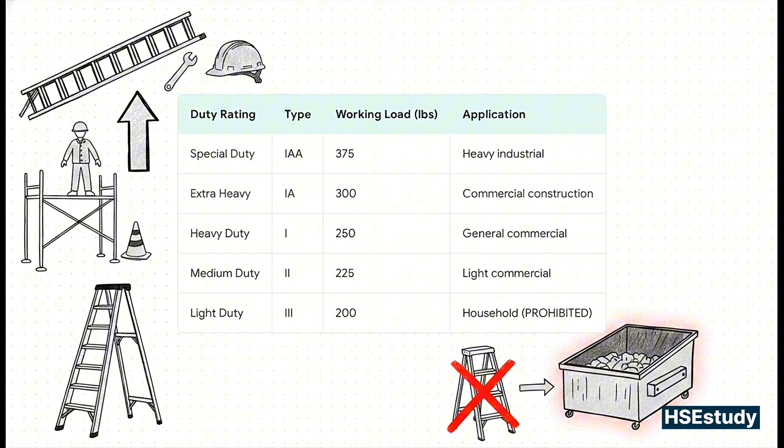Now, pay attention to this last one, the Type III light duty ladder. It maxes out at 200 pounds and is made for painting your living room or hanging Christmas lights. Let me be perfectly clear. Type III household ladders are strictly prohibited on our commercial job sites. If you bring one from your garage to this site, it's going straight into the dumpster. No exceptions.

So the crucial point here is understanding exactly how to calculate your weight on that ladder. We call this the weight math, or the maximum intended load. OSHA says you can never, ever load a ladder beyond its duty rating. And hey, it's not just about what the bathroom scale says when you step out of the shower. You've got to use the rule of 3. That's your body weight, plus the weight of your heavy tool belt and PPE, plus whatever materials you've got in your hands.

So if you're a 200-pound guy wearing a 30-pound tool belt and hauling up a 25-pound bucket of mud, congratulations, you're at 255 pounds. You literally just exceeded the legal limit of a 250-pound Type I ladder. You'd need an extra heavy-duty Type IA for that task. Always do the math before you climb.

And honestly, this brings up a really clear divide between the seasoned pros and the rookies out here. The common rookie mistake, and we see it constantly when guys are rushing to beat the clock, is just grabbing the nearest ladder off the truck to save a couple of minutes. They don't check the rating, they just want to get up there and get it done. Don't be that guy. The pro tip: a true professional always checks the ANSI duty rating label on the side rail before climbing. It takes 3 seconds.

Just 3 seconds to verify the maximum working load capacity and prove that ladder is actually rated for what you're about to do. Never climb a mystery ladder. If that tag is missing or you can't read it because it's covered in drywall mud, treat it as a massive red flag. And this brilliantly illustrates what we're talking about when you actually inspect that gear.

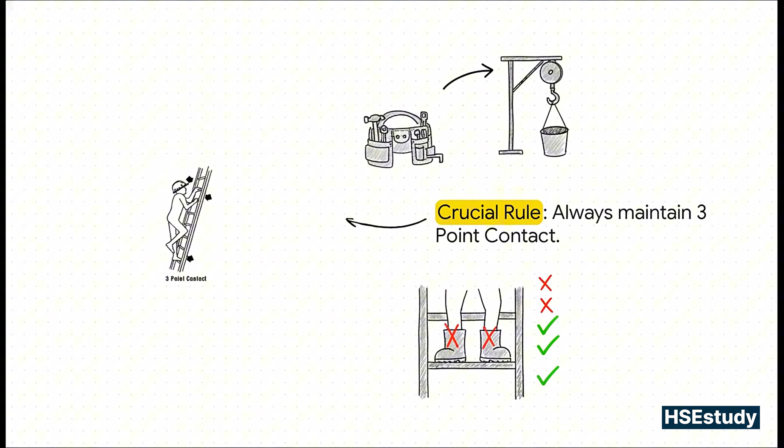Let's move to how this builds directly into the legal responsibilities of our site supervisors and foremen. Listen up, leaders. Under Subpart X, the competent person on site bears a really heavy burden. Number 1, you are legally required to ensure ladders are inspected before every single work shift. Number 2, if a ladder is cracked, bent, or missing hardware, you don't just lean it back against the wall for the next guy. You must immediately withdraw it from service and physically slap a do not use tag on it or destroy it so nobody else can accidentally use it.

And number 3, it is your duty to train the crew. If your workers can't explain load ratings to me, or they don't know proper setup and hazard recognition, your site is vulnerable, and frankly, you're failing as a leader.

So, let's say you've done everything right. You've checked the duty rating, you've done the math on your maximum intended load, and your supervisor has thoroughly inspected the gear and said it's good to go. The foundation is totally set. But what happens once the right ladder is chosen and inspected? How do we actually place that extension ladder against the building to guarantee it doesn't just kick out from underneath us the second we step on that first rung?

All right, so wrapping up our walkthrough on stairway requirements, let's go ahead and pivot to the next major hazard we deal with on our sites: portable ladders. Now, ladders are one of those tools that just get taken for granted, right? We use them at home to clean the gutters, we use them on the site to get to a working level, and because they're literally everywhere, ladder safety gets exactly zero consideration, right up until something goes terribly wrong.

Well, in our line of work, we cannot afford zero consideration. According to the CDC, looking back at the first 10 years of this century, falls from ladders made up an unbelievable 43% of all fatal falls. 43%. Just let that sink in for a second. We're talking about nearly half of all fatal falls involving a tool that almost every single one of your workers uses every single day. We've lost hundreds of lives because of a piece of equipment that seems so simple, people just forget to respect it.

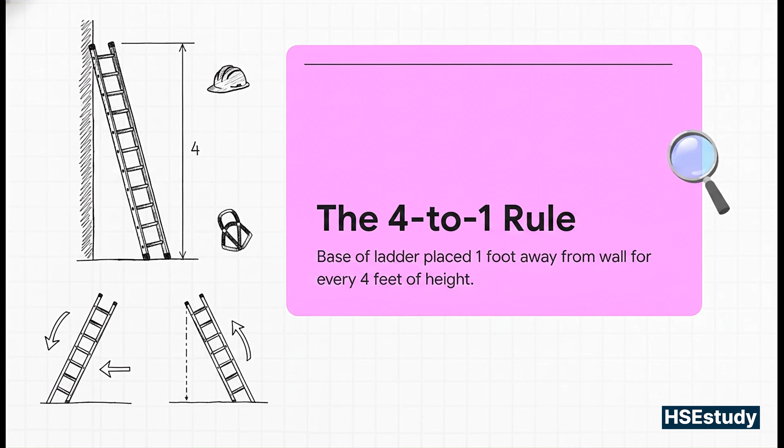And honestly, setup matters just as much as the condition of the ladder itself. OSHA strictly prohibits setting up ladders on boxes, barrels, or any other unstable bases just to gain a few extra inches of height. Ladders have to be used on stable and level surfaces, unless they're properly secured to prevent accidental displacement. I mean, setting up in the mud or on a slick floor without securing the ladder, that is just asking for an ambulance. Oh, and check their boots. Shoes need to be totally free of mud and grease before they even touch that first rung.

Industry veteran Richard Dixon puts it perfectly. There is absolutely zero excuse for using a damaged ladder. Before every single shift, these things must be inspected for visible defects. We are looking for cracked rails, loose rungs, missing feet, corrosion. And let me be perfectly clear, makeshift repairs with duct tape or scrap wood are strictly prohibited and completely unacceptable. If it cannot be repaired to manufacturer specifications, it's done.

Get rid of it. This right here is exactly why your site needs a formalized, competent person for ladders. And I don't just mean a title you throw at some guy on Tuesday. It requires specific training and, most importantly, explicit authority to stop work. When they do their daily inspections, if they find a structural defect, they must immediately mark it "Do Not Use." But honestly, in the field, just tagging it isn't always enough. A strong, competent person will physically destroy that bad ladder, literally cut it in half so no one else gets the bright idea to pull it out of the dumpster and use it anyway.

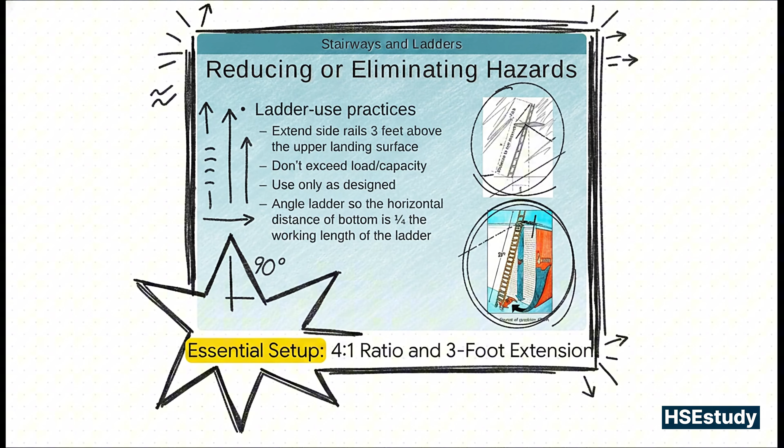Okay, so let's break down that angle calculation, which brings us to the famous 4-to-1 rule. This rule is the absolute bedrock of your safety. It's a simple, non-negotiable ratio that ensures gravity is working with you, not against you. And spoiler alert, gravity always wins, so we really have to do the math here.

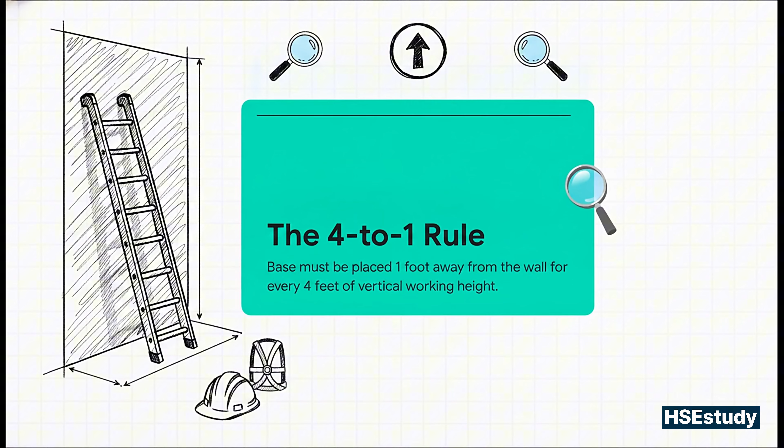If you're climbing 20 feet up in vertical height to reach a roof, the base of that ladder needs to be placed exactly 5 feet away from the wall. 1 foot out for every 4 feet up. It really is that straightforward. Now here is the exact math behind that rule. When you nail that 4-to-1 ratio correctly, you're creating an optimal 75.5-degree angle.

Extensive engineering data proves this is the exact sweet spot for balancing a worker's load while climbing. At exactly 75.5 degrees, the downward force of your weight is perfectly distributed between the structure you're leaning on and the ground below you. But what happens when you miss that sweet spot on the job site? Well, the dangers become obvious pretty fast.

Say you set it too steep, meaning an angle greater than 78 degrees. Your center of gravity shifts outward as you climb. Lean back just a hair, and boom, you tip backward, taking the ladder right with you.

On the flip side, if the angle is too shallow, less than 73 degrees, lateral forces skyrocket. They actually overcome the friction on the ground, and that base just kicks right out from under you. Both of these scenarios end in a catastrophic fall.

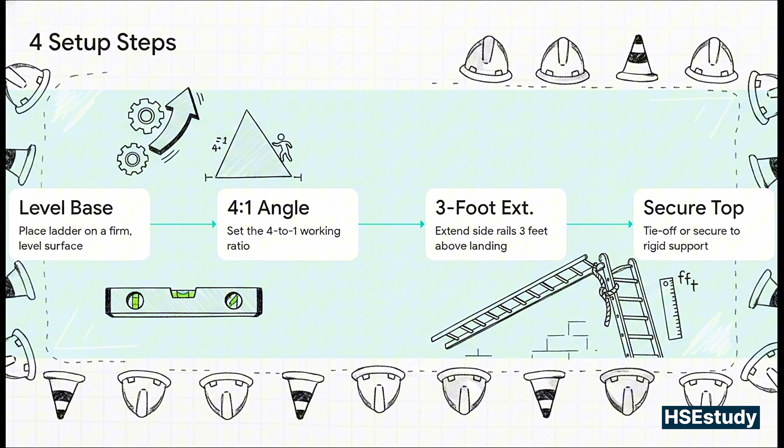As foremen and supervisors, I need you training your crews to mechanically run through these exact 4 steps every single time they position an extension ladder. Step 1, level and firm the base. Step 2, set that 4-to-1 working angle. Step 3, get those side rails extended 3 feet above the landing. And step 4, secure the top support. If you can build this muscle memory into your guys, you're eliminating the majority of ladder hazards before anyone even puts a boot on the bottom rung.

Take a look at this real job site photo and ask yourself, would you let your crew climb this? It's resting on loose, uneven dirt right next to what looks like a trench layout. This is a massive, massive hazard. The surface is neither level nor firm. The second a worker gets halfway up, their weight is going to shift that left foot right into the loose soil, twist the ladder, and throw them right off.

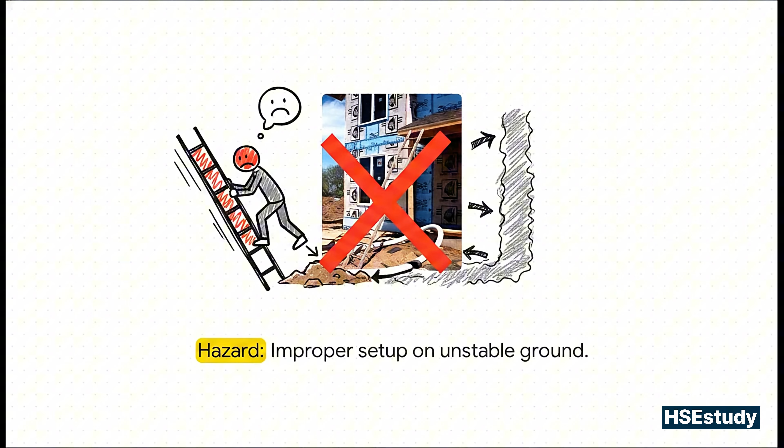In my time walking sites, I see these exact same setup mistakes happening every single day. Why? Usually, it's just guys rushing and skipping the basics of 1926 Subpart X. They eyeball the angle instead of actually measuring the 4-to-1 ratio. They set up on slippery or unstable dirt. They skip tying off the top because they're just going up for a second. They carry heavy tools in their hands instead of using a tool belt or a hoist, and they overreach to get the job done faster.

Speaking of overreaching, here's a great field trick to keep in your back pocket to avoid that specific mistake: the belt buckle rule. It is incredibly simple. If your belt buckle crosses outside the vertical side rails of the ladder, you've shifted your center of gravity way too far. Stop, climb down, and move the ladder over. Seriously, it takes maybe 30 seconds to reposition, but stretching to save that half a minute is a leading cause of lateral tip-overs.

And OSHA Regulation 1926.1053 is crystal clear in its text. If you literally cannot find a perfectly level and stable surface, say you're working on a sloped grade that you just can't level out, that ladder must be mechanically secured to prevent accidental displacement. You can't just have your buddy hold the bottom while you climb 30 feet up. It absolutely has to be properly secured.

Securing the top of the ladder to a rigid support that won't deflect is just as critical. Sometimes you're stuck in a spot where the ladder is just too short to safely get that mandatory 3-foot extension above the landing surface. In that specific scenario, the OSHA standard dictates that the ladder must be secured at its top to a rigid support, and you have to provide a grasping device, like a grab rail, to help the worker mount and dismount safely.

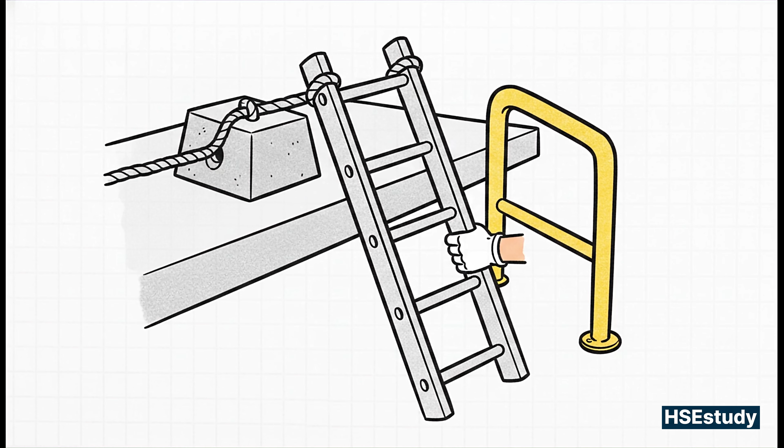Look, ignoring these setup rules isn't just dangerous, it's a massive liability for your site. Ladder violations were the number 3 most frequently cited OSHA violation across all industries in fiscal year 2024, with thousands of citations issued. And specifically, failing to extend those side rails 3 feet above the landing accounted for the lion's share of them. It's a super common oversight, and inspectors are actively hunting for it.

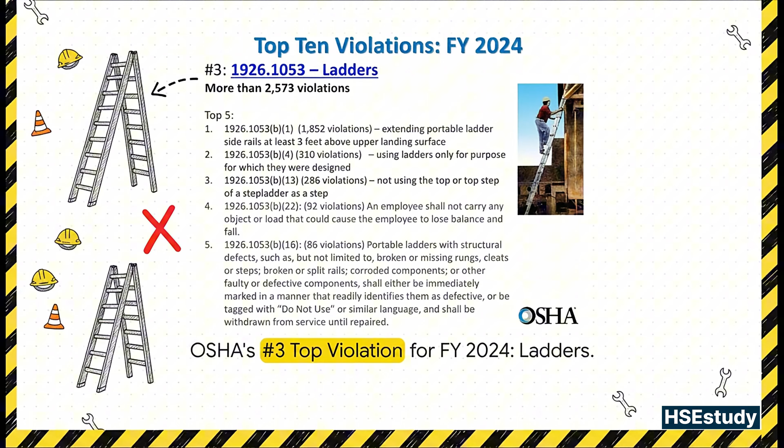Want to know what that oversight costs? If an inspector catches a serious 1926.1053 violation on your watch, like missing that 3-foot extension or totally ignoring the 4-to-1 angle rule, you're looking at a maximum fine of $16,550 per offense, based on the 2025 penalty schedule. And that's just the baseline for a serious violation. If they deem it a repeated or willful violation, those numbers just skyrocket.

Ultimately, that financial and moral accountability falls squarely on you, the supervisors. You have to ensure a competent person is thoroughly inspecting every single ladder for visible defects before a work shift even begins.

That means physically running your hands down the stiles looking for cracked rails, checking for loose rungs, missing slip-resistant feet, and making sure the whole thing is completely free of oil, grease, or any slipping hazards. Inspection isn't a nice-to-have, it's a fundamental requirement.

Now, if you do that inspection and find a cracked fiberglass rail, a bent aluminum rung, or missing hardware, what do you do? I'll tell you what you don't do. Temporary duct tape fixes. There are absolutely no field repairs like that allowed. None. You must immediately tag that ladder do not use and pull it from service until it's properly repaired to its original design specs or totally destroyed. Leaving a busted ladder leaning against the wall is practically begging someone to use it and get hurt.

All right, so the equipment is perfectly set up. It's fully inspected, sitting firmly on level ground at a perfect 75.5-degree angle, extended 3 feet above the roofline and locked in securely at the top. The physics of the ladder are completely optimized, which means the only remaining variable for a safe ascent is exactly how you position your hands and feet once you step onto that first rung. Let's look at exactly how to do that.

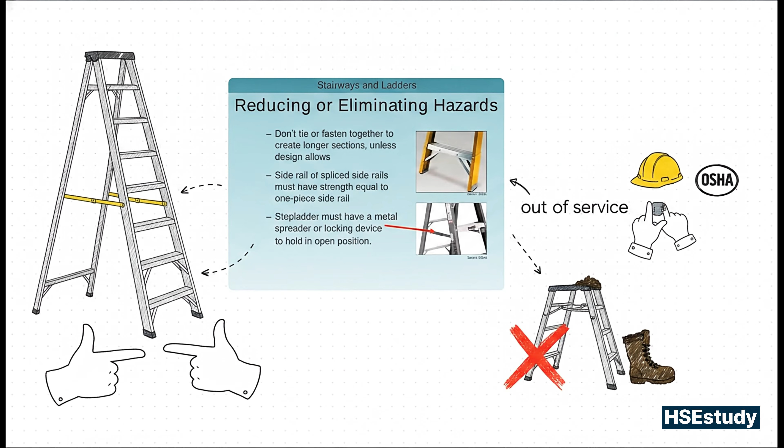And this right here brilliantly illustrates one of the most critical structural components of the A-frame. Take a close look at the metal spreader bar on the screen. OSHA strictly requires that every single stepladder have a metal spreader or locking device to hold the front and back sections in an open position. Here's a pro tip for the field. Never, ever climb until you physically verify those spreaders are fully pushed down and locked into place. If they're slightly bent, or if the hinges are just packed solid with drywall mud and won't lock out fully, that ladder is out of service, period.

Okay, this brings me to a habit I see out in the field all the time, and it drives me crazy. Never, ever use a closed stepladder leaning against a wall like an extension ladder. When you do this, you completely destroy its lateral stability. You see, the rubber feet on a stepladder are angled to grip the floor specifically when it's open as an A-frame. When you lean it closed, only a tiny little edge of hard plastic or metal actually touches the floor, making a slide out almost guaranteed. OSHA cited 310 violations last year for using ladders for purposes other than what they were designed for, and using a stepladder as a straight ladder is exactly the kind of shortcut they're looking to catch.

Let's break down the physical kinematics of safe positioning when you're actually up there working. Always face the ladder whenever you climb up or down. And here is a fantastic memory trick you can teach your crews.

We call it the belt buckle rule. Keep your belt buckle centered right between those side rails at all times. Do not overreach. If you lean your belt buckle past that side rail, your center of gravity shifts completely outside the footprint of the ladder, and gravity is going to take over.

Also, never straddle the front and back sections. And please, whatever you do, don't ever try to walk or hop the ladder while you're standing on it. Just climb down, move the ladder, and climb back up. It takes 10 seconds, and it could literally save your career.

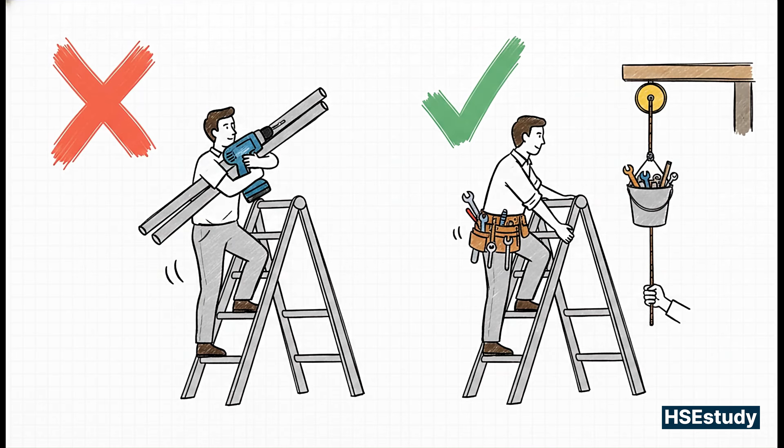Remember that 3 points of contact rule we talked about? Well, how exactly are you supposed to maintain it if your hands are full of drills and conduit? You can't. Carrying tools or loads in your hands while climbing totally destroys your balance and stability. This is an explicit OSHA violation, specifically 1926.1053(b)(22), and it was cited 92 times last year. The solution here is so simple. Just wear a tool belt, or use a hoist line to pull your materials up once you're safely in position.

All right, listen up, because the most crucial point of the day is right here. I need everyone to mentally highlight this OSHA standard. 1926.1053(b)(13) states, the top or top step of a stepladder shall not be used as a step. This is the most critical warning of this entire field lesson. Absolutely no standing on the top cap and no standing on the step directly below it.

I know the temptation is huge. You just need to reach that one last screw. You just need a little extra height. Actually, scratch that. Just don't do it. Go get a taller, correctly rated ladder. Let me explain the why behind this rule, because understanding the actual mechanics might just save your life.

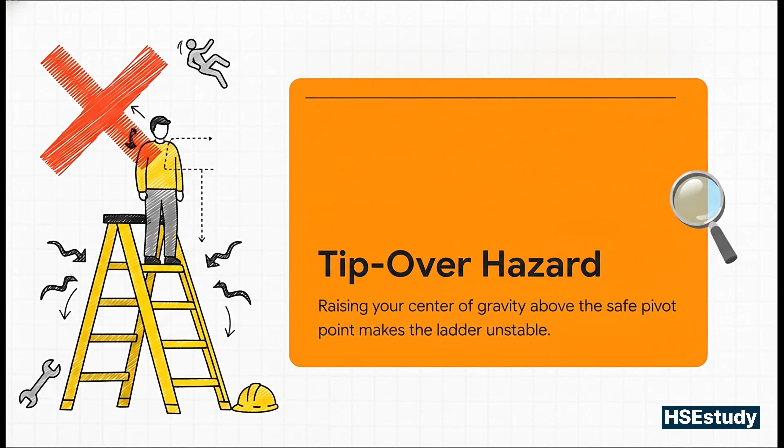It creates a kinematic tip-over hazard. When you stand on those top 2 steps, you raise your body's center of gravity way above the safe pivot point of the ladder. Below that point, your weight pushes the ladder firmly down into the ground, stabilizing it. But above that point, any slight movement, just reaching for a tool or turning your shoulders, turns your entire body into a lever that pushes the ladder right out from under you. It physically turns a perfectly stable tool into a deadly tipping hazard.

If you think OSHA inspectors don't notice this stuff, just look at this hard data right here. There were 286 annual violations specifically for standing on the top step of a stepladder. Inspectors are actively hunting for this exact dangerous habit because they're the ones who have to investigate the traumatic brain injuries and shattered ankles that happen when these ladders tip over.

Supervisors, listen to me. If you see a worker's knees resting against the top cap of an A-frame, you know instantly they are standing way too high. Stop work, get them down, and get a taller ladder.

And that brings the responsibilities straight back to the folks running the job sites. Under 1926.1060, foremen and supervisors have a strict OSHA mandate. You've got to ensure every single employee using these ladders is trained by a competent person. And it's not just about telling them how to climb up and down. You have to teach hazard recognition.

You need to train your crews on how to spot a bad setup, how to verify those spreaders are actually locked, and how to read and enforce the maximum load capacities. And remember, retraining is required whenever you see these bad habits creeping back onto your site. Document it, enforce it, and make it a non-negotiable part of your daily safety culture.

Well, let's see how these principles build into our next critical area of focus. We spent a lot of time today on portable ladders. You know, the extension and A-frames we carry all around the site. But as our construction projects advance, we increasingly rely on permanent, fixed ladders that are bolted directly to the structures around us.

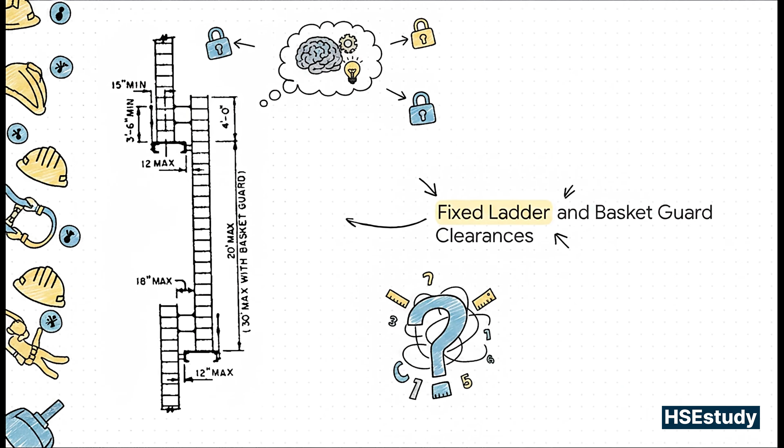So if you're the competent person on site, you really have to understand the complex anatomy of these older, grandfathered cage setups. There are maximum intervals, staggered landing platforms, and very, very strict clearances that have to be maintained. Now, memorizing the entire code book for your daily field walk, yeah, that's tough. So I always teach my crews a super simple field memory trick to lock in the absolute most critical numbers you need to know. I call it the 16-7-42 rule.

And it starts, predictably, with the number 16. 16 inches is the absolute minimum clear distance required between the side rails of any fixed ladder. If you're out there inspecting a ladder and the width between those rails is less than 16 inches, it is an immediate no-go.

Here is a super common worker mistake I see out there. Contractors try to save space, and suddenly you've got a worker wearing heavy winter gear, thick steel-toed boots, and a fully loaded tool belt trying to squeeze up this tiny ladder. I've literally seen guys get their tool belts wedged halfway up a climb. It's an ergonomic nightmare, and it totally prevents safe movement.

Next up in our rule is the number 7. And this number actually pulls double duty on the job site. First, you've got to maintain a minimum 7-inch clearance behind the rung. Why? Well, that's your boot space. Pro tip from the field here. Always look for conduit, pipes, or blockwork jutting out right behind the ladder. If there's an obstruction, a worker's boot can't fully engage the rung. Their foot slips, and bam, we've got an incident.

Second, 7 is the minimum step across distance at the point of access. So when a worker steps off the ladder onto the landing, that gap needs to be between 7 and 12 inches. If it's any wider than 12 inches, OSHA steps in and requires you to build out a proper landing platform to bridge that dangerous gap.

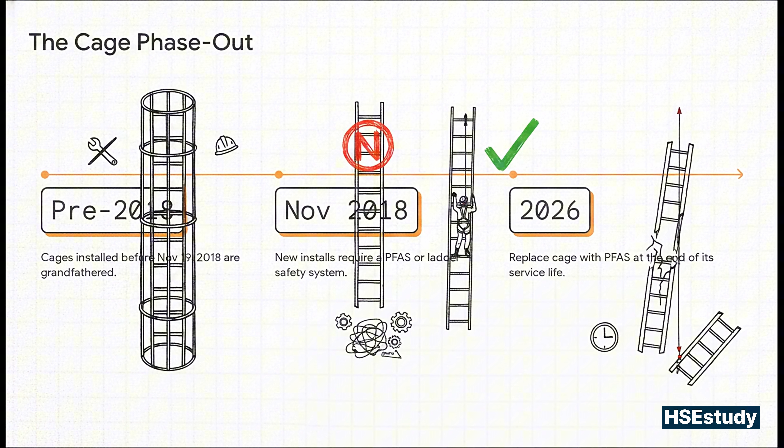Now, I want you to take note of the recent 2026 update. Originally, OSHA had this hard deadline of 2036 to just rip out all the old cages. Well, the update removes that hard deadline, but the strict rule still remains. Whenever that old ladder reaches the end of its service life, or if you repair or replace a section of it, you must upgrade the whole thing to a modern fall arrest system.

That being said, I know a lot of you still have those grandfathered pre-2018 cages surviving on your industrial sites right now. And if your crews are still climbing them, you must enforce the 50-foot rule. For any fixed ladder that is still relying on a cage, OSHA requires landing platforms at maximum intervals of 50 feet. Look, climbing is exhausting work, plain and simple. If your guys are climbing 80 feet of caged ladders straight up without an offset rest platform, you've got a serious violation on your hands, not to mention a major fatigue hazard that could easily lead to a catastrophic fall.

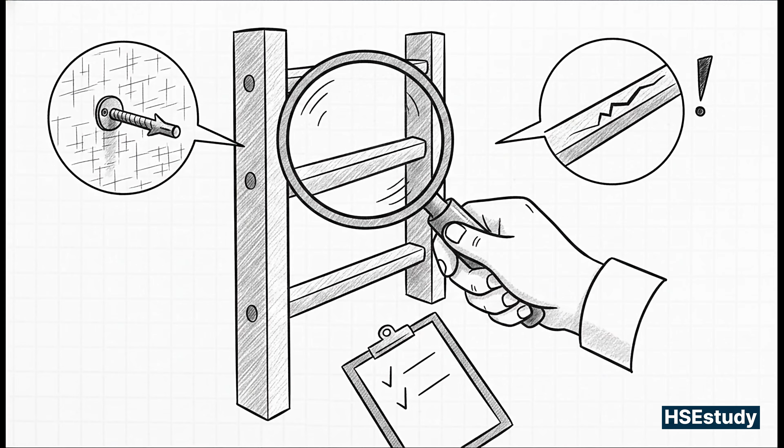So, as site supervisors, ensuring all of this remains compliant falls squarely on our shoulders. Your designated competent person needs to get hands-on periodically. You got to check the structural mounting to ensure the standoff brackets and base plates are actually secure. Here's another pro tip from the field. Always look really closely at the anchor bolts. They are almost always the first thing to rust out from harsh weather exposure.

You'll want to inspect the side rails for any structural cracks. Verify that the rungs have a uniform 12-inch spacing on center, and if you do have a well or a cage, run a careful visual check to ensure there are absolutely zero projections inside, nothing that could snag a worker's harness or clothing during a climb. It's a thorough checklist, for sure.

And honestly, if you and your competent person are out there doing these inspections correctly in the harsh job site elements, eventually you are going to find a problem. It might be a cracked weld, a loose bracket, or a bent rung, which naturally leads to a critical question for any foreman. What exactly happens when you spot a critical defect on a ladder bolted 40 feet up your building? How do we instantly isolate that hazard before someone tries to climb it on the very next shift? Well, let's keep things moving right into the exact protocol for defect tagging and withdrawal from service.

Masterclass Section 6, Ladder Inspection and Defect Recognition. All right, we just wrapped up the strict requirements for fixed ladders and cages, right? Good, but now we really need to shift gears and talk about the equipment that gets dragged around the job site every single day. I'm talking about portable ladders. You know, you'd think because we use them at home to clean the gutters, we'd be total pros on the site. But honestly, that familiarity is exactly where the danger creeps in.

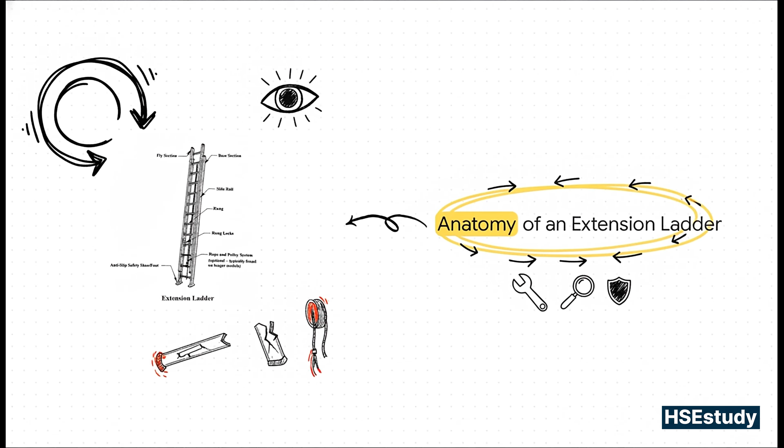Get in there and inspect the rope and pulley systems for any fraying, and look really closely at the anti-slip safety shoes. If any one of these components is compromised, the whole system fails. The secret here is making it a habit. This pre-use visual checklist should take you less than 60 seconds, and it absolutely must be done by every worker every single time they go to climb.

Step 1, check for legible tags and weight ratings. Step 2, run your eyes over the rails and rungs looking for cracks or dents. Step 3, test the hardware. Make sure the spreaders actually lock and the hinges aren't loose. And Step 4, check the feet. Slick mud or worn-out rubber on the feet means you have zero traction on the ground.

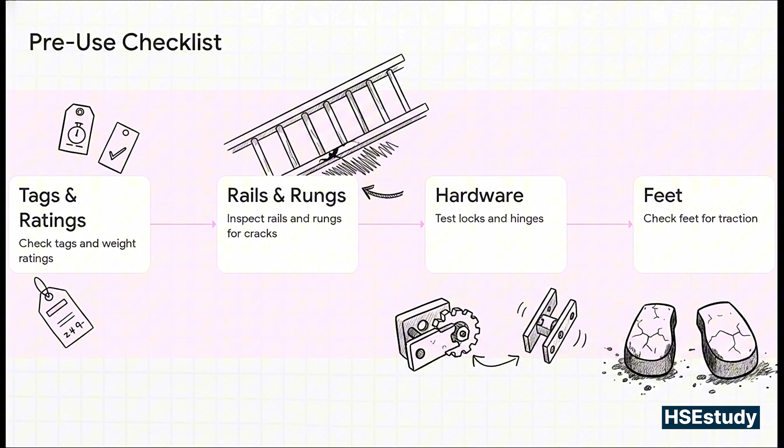Now, if you're still rocking wood ladders out there, you need to know how OSHA classifies timber defects. Let's translate their terminology into everyday field speak. Shake is a separation right along the grain that completely guts the shear strength of the wood. Wane just means you've got missing wood or bark on the edge, which shrinks your load-bearing area. Compression failures are those unseen buckles from overloading the ladder on a past job. And decay, well, that's just rot. Any of these mean that ladder is structurally compromised.

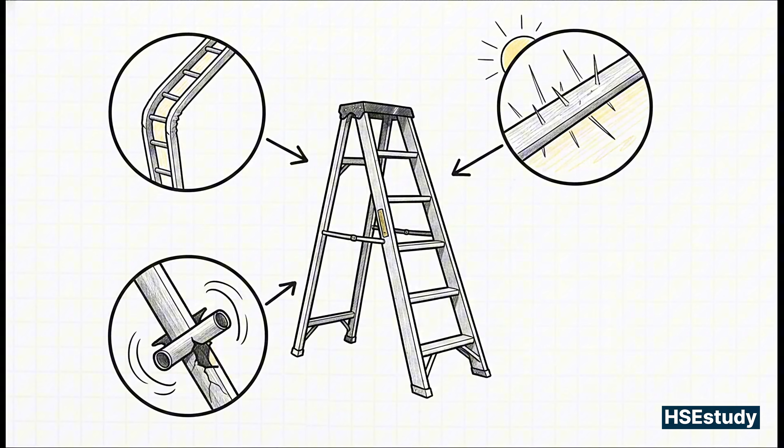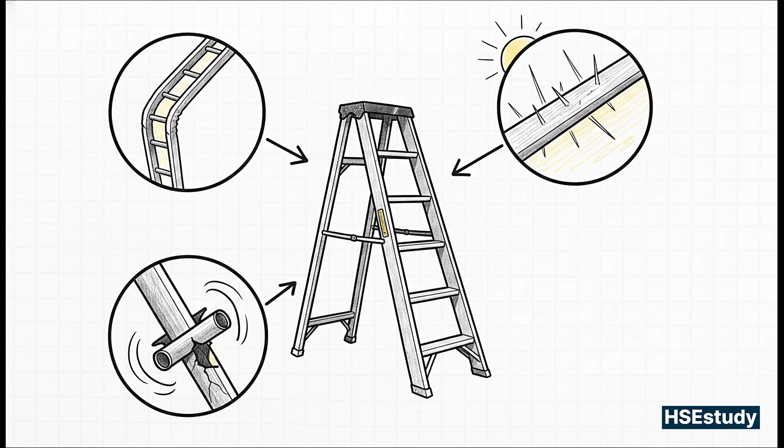But let's be real, most of you are hauling around fiberglass or metal ladders. With these, you're looking for different killers. Blooming is what happens when UV rays from the sun or chemical exposures degrade the fiberglass. It exposes these raw glass splinters underneath, and worse, it completely wrecks the ladder's electrical resistance. Watch out for structural deformation too, like bent side rails. And connection play? Listen, if you grab a rung and it wiggles or twists even a little bit inside the side rail, that connection is shot. That ladder's dead.

And supervisors, hear me on this. Makeshift fixes are absolutely never acceptable. You cannot duct tape a cracked fiberglass rail. You cannot bolt a scrap piece of 2x4 over a busted rung. If a ladder does not meet the manufacturer's original design criteria, it is out of service, period. The law backs this up with zero gray area.

OSHA Standard 1926.1053(b)(16) flat out states that ladders with structural defects shall either be immediately marked or be tagged with Do Not Use, and shall be withdrawn from service. This is a strict legal mandate. It's not a friendly suggestion, and let me tell you, compliance officers do not give warnings for this.

So how do we actually handle this out in the dirt? OSHA gives us 3 approved isolation methods. Number 1, slap a highly visible, durable red Do Not Use tag on it right away. Number 2, mark the ladder in a bold, unmistakable way that screams defective to anyone who even glances at it. Or number 3, physical blocking. Literally bolt a sheet of plywood across the rung so no one walking by can possibly step on it. Take the choice out of their hands.

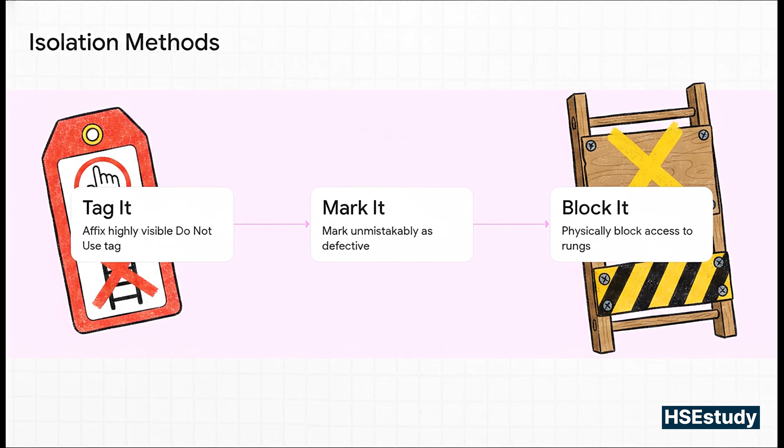Let's look at how this ties into supervisor responsibilities. Based on actual OSHA citation data, there are 4 main extension ladder violations that inspectors are constantly writing tickets for in the field. Failure to extend the ladder 3 feet above the landing, using ladders for the wrong purpose, failure to mark and pull defective ladders, and carrying loads that cause a loss of balance. This is exactly what compliance officers are hunting for when they walk onto your site.

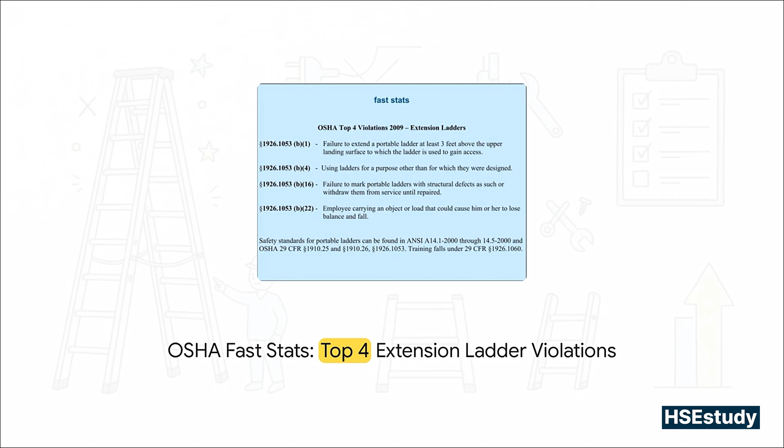And honestly, those citations stem directly from the common worker mistakes that drive every seasoned foreman completely crazy. Stuff like using a stepladder folded up and leaned against a wall like an extension ladder. Don't do that. Or standing on the top step, the top cap, just to get an extra few inches of reach instead of just climbing down and grabbing a taller ladder. Or carrying heavy tools in your hands up the rungs instead of utilizing your tool belt.

To avoid those citations and actually stay safe, you've got to master the basic math of a safe setup. It's the 4-to-1 ratio and the 3-foot extension rule. For every 4 feet of height to your top support point, the base of the ladder needs to be 1 foot out from the wall. Pretty simple. And those side rails must extend at least 3 feet above the upper landing surface. That gives you the stability and that vertical handhold you absolutely need to step off safely.

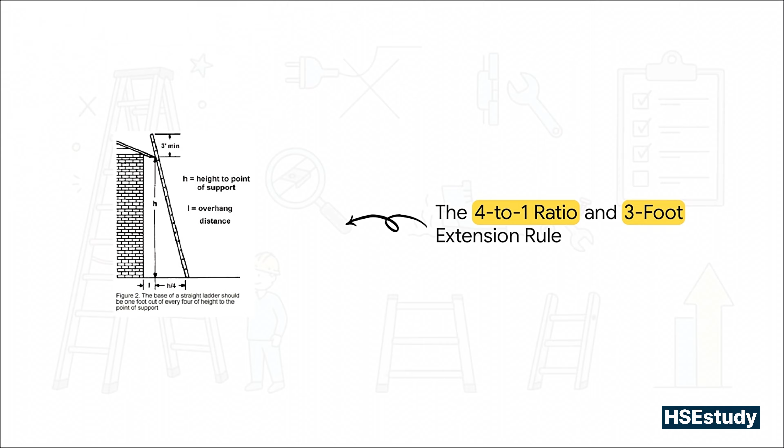Speaking of vertical handholds, keeping your balance means maintaining 3 points of contact at all times. That means 2 feet and 1 hand or 2 hands and 1 foot. If you are carrying a stack of shingles or a bunch of heavy tools in your hands, you've just sacrificed your stability. Put the small stuff in a tool belt, or better yet, use a hoist line to pull your heavy materials up after you've safely reached the landing. All right, I've got a massive pro tip for the supervisors running the show.

Take the guesswork out of load ratings for your crews entirely. Standardize your whole job site inventory on Type 1A ladders, which hold 300 pounds, or Type 1AA ladders, which handle 375 pounds, and make them all fiberglass. Doing this completely eliminates electrical conductivity hazards, and it guarantees those ladders can easily handle heavy guys wearing full tool belts and carrying dynamic loads.

So the crucial question I want to leave you with right now is this. Would you really bet your life or your crew's lives on a cracked rung or a skipped 60-second inspection? Because when gravity takes over, there are no second chances. Make those daily inspections a non-negotiable habit on your sites. All right, grab your gear, guys. Let's head over to the stairwells and take a look at the requirements for temporary stairs.

Section 7, Temporary Stairways. So, picking up right where we left off, if a ladder gets a Do Not Use tag slapped on it during your morning inspection, we need alternative access, like immediately. You can't just leave your crew stranded up there or let them improvise. Under OSHA Subpart X, anytime there's a break in elevation of 19 inches or more and no ramp or hoist is provided, we absolutely have to provide a proper stairway or ladder. And that brings us to the importance of temporary stairways out there in the field.

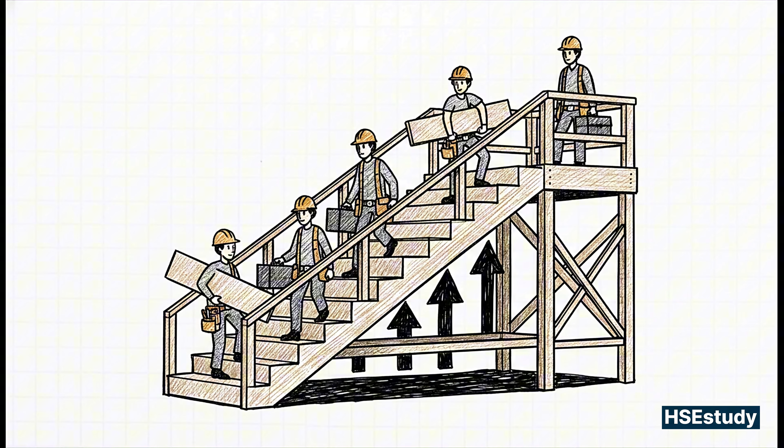Stairways, the safe choice for frequent access. Look, when we talk about moving guys between levels, especially with heavy foot traffic, stairways are always the safe choice. Think about your crews out there for a second. You've got guys hauling heavy tool belts, carrying materials, moving fast. Relying purely on portable ladders for a high-traffic transition point, man, that's just asking for an accident. That's why OSHA steps in and requires proper temporary stairways to keep everyone moving safely and efficiently.

If the permanent stairs aren't poured or installed yet, we step up and build a temporary route. And here's the kicker. It needs to be built tough enough to support 5 times its intended load. What you're seeing here brilliantly illustrates a solid field solution. As a foreman doing your ground-up walkthrough, a properly constructed wooden temporary stairway is exactly what you want to see. Notice the uniform construction, the sturdy stringers, and those rails securely in place.

Compare that in your head to a single portable ladder leaning against a trailer. A stairway like this provides essential stability. Your guys can walk down naturally, facing forward, with a secure handhold. It completely changes the safety dynamic of your site.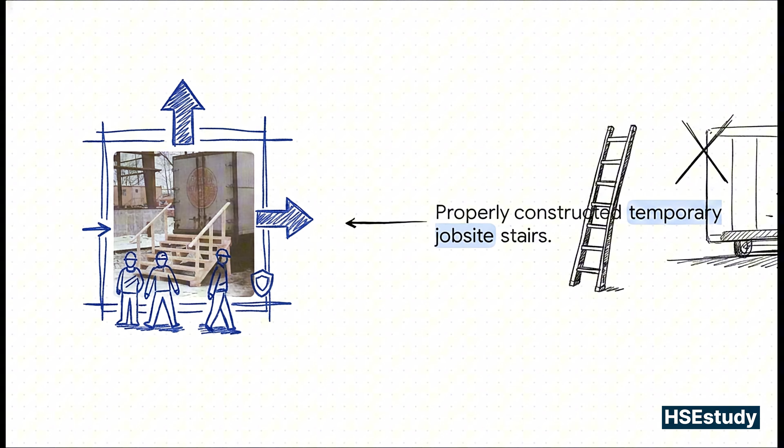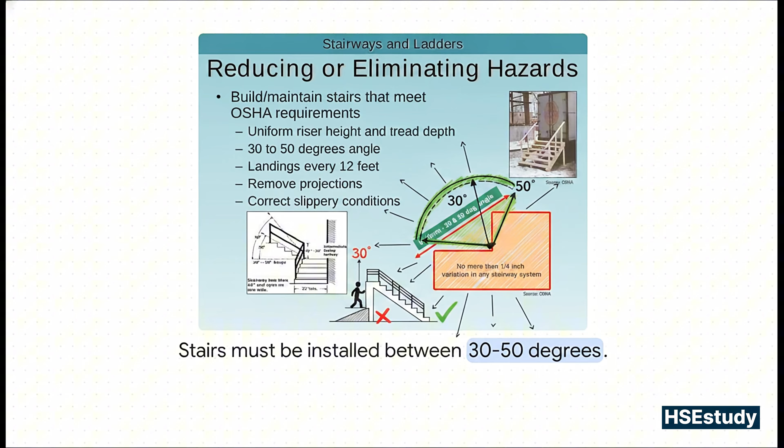Okay, let's talk geometry, because OSHA is incredibly specific here. Notice that angle highlighted in green? Temporary stairs must be installed between 30 and 50 degrees from the horizontal. We cannot just lean stringers at whatever angle is convenient for the space we have, right? This strict 30 to 50 degree geometry is entirely necessary to prevent the descent from being dangerously steep or, on the flip side, way too shallow. It keeps the center of gravity directly over the worker's feet where it belongs. If you push past that 50-degree mark, it stops functioning like a stair and literally starts acting like a highly dangerous, non-compliant ladder.

1/4 of an inch. Now, what's really interesting here is this single measurement. That is the absolute maximum variation allowed for riser heights and tread depths in any single stairway system. I need to aggressively highlight this for you, because I see this violated on job sites all the time. You might think, a half-inch difference on a bottom step is no big deal. But man, it is a massive hazard.

Here is the science behind it. The human brain subconsciously programs your stride length and foot lift height on the very first few steps you take. So if step number 4 is suddenly half an inch taller than the rest, a worker's toe catches and they go down hard. Keep those measurements uniform.

Stairway landing requirements. Let's move to landings and see how this builds our safe access route. You can't just build a 20-foot staircase straight up into the sky. OSHA requires a landing platform every 12 feet or less of vertical rise. Long climbs require rest platforms, and honestly, they provide a break in the momentum if someone trips.

Those landings have to be at least 30 inches deep in the direction of travel, and a minimum of 22 inches wide. And here is a crucial pro tip for your framing stages. If a door or gate opens directly onto that stairway platform, the swing of the door can never, under any circumstance, reduce the effective width of that platform to less than 20 inches.

A door swinging out cannot pinch a worker against the rail or push them down the stairs. Which brings us to a transition in our walkthrough and a major job site hazard. Look closely at these skeleton metal pan stairs. We see this all the time in commercial multi-story builds.

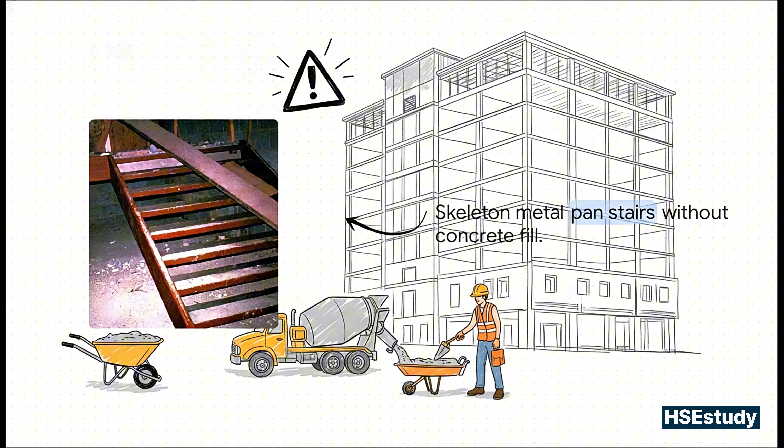The metal frames get installed, but they are just sitting there, waiting for the concrete fill to be poured to create the actual steps. Would you let your crew walk on this? I want you to really look at those deep, empty metal pans with those sharp raised lips. And I'll ask you directly, would you let your guys walk on that? The answer has to be a hard, non-negotiable no.

OSHA absolutely prohibits foot traffic on unfilled pan stairs, except during the actual construction of the stairs themselves. Those exposed metal lips are the ultimate trip hazard, especially when guys are carrying materials and literally can't see their feet. Securing pan stairs. So, what is the practical field solution?

If we need to use that stairwell before the concrete trucks arrive, we have to temporarily secure it. Temporary treads made of wood or another solid material must be cut, placed in the pans, and secured. But here is the critical detail. They must be filled to the absolute top edge of the pan, not half an inch below, flush to the top edge to entirely eliminate that tripping hazard.

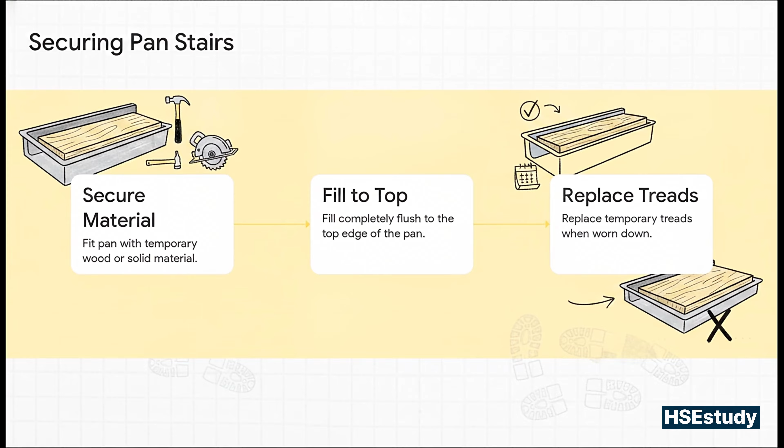And listen, as the supervisor, this is on you to monitor. If hundreds of heavy work boots wear down that temporary wood below the pan edge over a couple of weeks, you got to pull them out and replace them. Handrails versus stair rails. Know the difference.

Now let's clear up one of the most confused topics for workers and, yeah, even some supervisors out in the field. When we're doing our OSHA Subpart X inspections, people constantly mix up these two terms. They sound similar, but they serve two entirely different critical safety functions on your stairways. Let's break them down side by side.

First, the handrail. A handrail is exactly what it sounds like. It is the handhold. It provides an adequate grip for an employee to avoid falling backwards or slipping down the stairs. It sits between 30 and 37 inches high, and temporary ones need at least 3 inches of clearance from walls or other objects. Why? So a worker wearing thick work gloves can actually wrap their fingers all the way around it.

Now on the flip side, the stair rail. A stair rail is essentially your fall protection guardrail. It runs along the unprotected open sides of the stairway, and it sits higher, between 36 and 42 inches. Its job is to prevent a worker from falling completely over the edge of the staircase.

Now, the top edge of a stair rail can sometimes serve double duty as a handrail if it happens to be perfectly between 36 and 37 inches, but the crucial point is that both systems must be built tough enough to withstand 200 pounds of force applied in a downward or outward direction.

The 4 risers rule. So when exactly do you need to spend the time and lumber to install these rails on temporary stairs? I'll give you a super easy memory trick for the field. It's the 4 risers or 30 inches rule. If a temporary stairway has 4 or more risers, or if it rises more than 30 inches, whichever comes first, it absolutely must be equipped with at least 1 handrail and a stair rail system along every unprotected side.

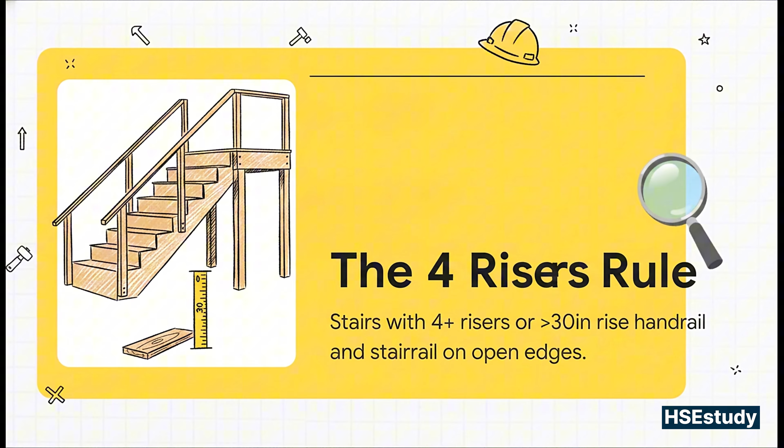Commit that to memory right now. 4 risers or 30 inches. That is your trigger for mandatory rail installation. Supervisor inspection duties. As we wrap up our walkthrough on stairways, let's lock in your daily supervisor inspection duties. Before your crew hits the stairs in the morning, you must eliminate any slippery conditions. Ice, mud, grease. Get it cleaned up.

You have to remove hazardous projections. Usually that means scanning for protruding nails left over from the framing crew. You need to physically shake those rails to ensure they still meet that 200-pound force capacity. And finally, under Subpart X, temporary spiral stairways are completely banned. Employees must never use non-permanent spiral stairs. The extreme tripping hazards from irregular tread depths, plus the physics of an angular descent, it's just way too dangerous.

What does the job site injury data tell us about our next steps? So, we've walked the site, we know how to properly tag our ladders, and we know exactly how to construct, measure, and inspect our temporary stairways to keep compliance tight and the crews safe. But what happens when these specific rules are ignored, or a worker takes a shortcut?

What does the job site injury data tell us about where our biggest blind spots really are out there? All right, so picking right up from those staggering injury and violation statistics we just covered, we all know exactly what's at stake here. We're talking over 100 fatalities a year and literally thousands of injuries just from ladders alone. And honestly, that is exactly why we don't just memorize OSHA Subpart X to pass some exam. We have to actually live it out there on the site.

So let's dive straight into this final section. We're going to transition smoothly from looking at what goes wrong to how we actively, aggressively prevent those failures on our job sites every single day. Look, guys, I've been walking real construction sites for over 20 years now. I've seen the aftermath of a ladder kickout, I've seen stairway collapses, and I can tell you firsthand, those citations we just talked about aren't just paperwork. They represent broken bones, ruined livelihoods, and honestly, much worse.

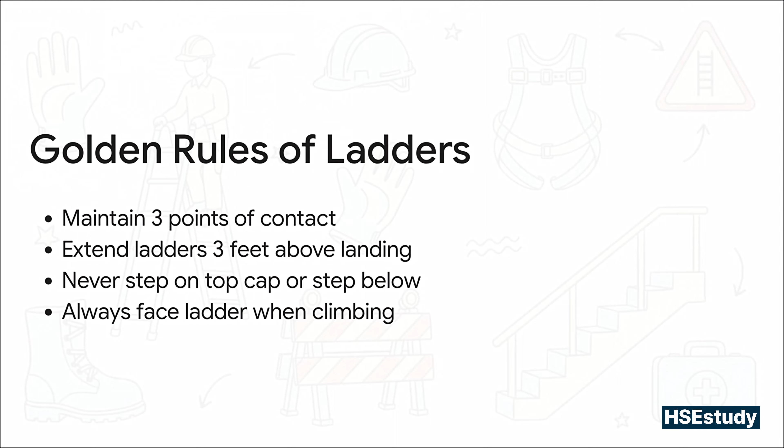And finally, always face the ladder when going up or down. Keep your belt buckle firmly between those side rails. If you find yourself reaching so far that your buckle crosses the rail, well, you need to climb down and just move the ladder. Now, let's see how all this builds into our actual setup protocols.

4 to 1. Listen, if you only take away one single number from this entire masterclass, make it this one right here. This is the absolute golden ratio for extension ladders. For every 4 feet of vertical height to where the ladder touches the structure, the base must be placed exactly 1 foot away from the wall. So if you're climbing 20 feet up, that base needs to be exactly 5 feet out, right? Any steeper, and you risk tipping backward. Any shallower, and that base is going to slide out right from under you. This simple, easy math prevents fatal base slide incidents every single day.

Moving on, let's talk about the equally critical geometry for stairways. Whenever we build or maintain stairs, whether they're temporary or permanent, they have to be set at an angle between 30 and 50 degrees from the horizontal. That right there is the sweet spot for a natural, safe human stride, especially when you're carrying heavy tools.

Plus, any stairway with 4 or more risers, or one that rises more than 30 inches, absolutely has to have a stair rail system. And that top rail needs to be at least 36 inches high and capable of withstanding 200 pounds of force in any downward or outward direction. No cutting corners on that one.

Now, here's a little detail that trips up a lot of seasoned crews: uniformity. There can be no more than a 1/4 inch variation in any stairway system's riser height or tread depth. You might be wondering, why is OSHA so ridiculously strict about 1/4 inch? Well, it all comes down to muscle memory.

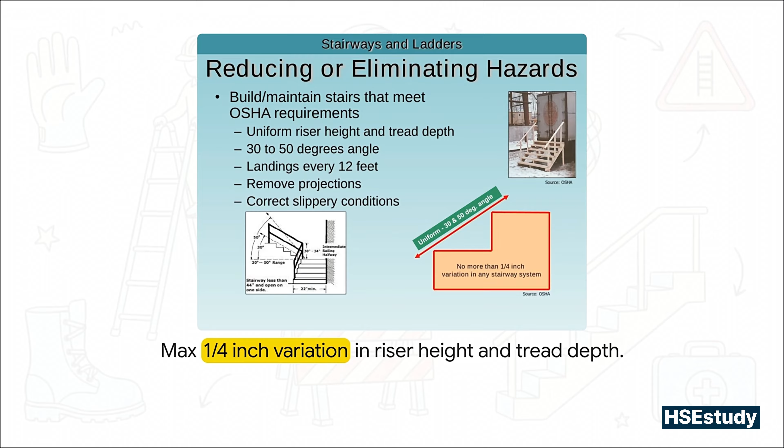Speaking of temporary stairs, pan stairs are something you see constantly in commercial construction. But as supervisors, you have to know that these simply cannot be used safely unless they are properly secured in place and completely filled to the top edge with wood or some other solid material. If you let a crew walk on unfilled pan stairs, I guarantee their boots are going to catch that steel lip and you are going to have a severe face-first fall on your hands.

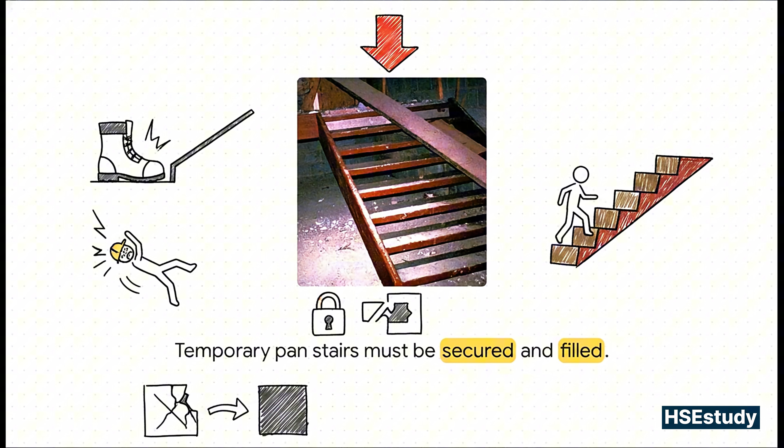It's just a matter of time. Secure them, fill them, and replace any worn landings immediately. Okay, let's put this knowledge to the test, all right? Let's run a real-world job site scenario.

Imagine you're walking the site and you spot a worker carrying a heavy toolbox in one hand, climbing up a portable ladder to a roof. You also notice the ladder extends exactly 1 foot over the roof landing. Take a second. Really picture that situation in your mind's eye. What are the specific hazards that you, as a safety leader, need to spot and stop right that second?

Well, if you caught both of these issues, awesome job. First off, that ladder only extending 1 foot, that is a direct violation of 1926 Subpart X. It has to extend at least 3 feet above the landing so the worker actually has something to hold onto while transitioning onto and off the roof. If pushing it up 3 feet is physically impossible, it's got to be rigidly secured at the top with a grab device installed.

Second, that heavy toolbox. Carrying a heavy load in one hand completely destroys the 3 points of contact rule we just talked about. It also completely throws the worker off balance. The correct protocol here? Climb that ladder empty-handed using your 3 points of contact and use a rope or a hoist line to pull that heavy toolbox up once you are safely secured on the landing.

Let's throw another practical quiz question at you, focusing heavily on your daily responsibilities. It's 6:30 a.m. You're doing your required pre-shift inspection of your crew's equipment, and you come across a fiberglass extension ladder with a severely cracked side rail. What is your immediate, non-negotiable action?

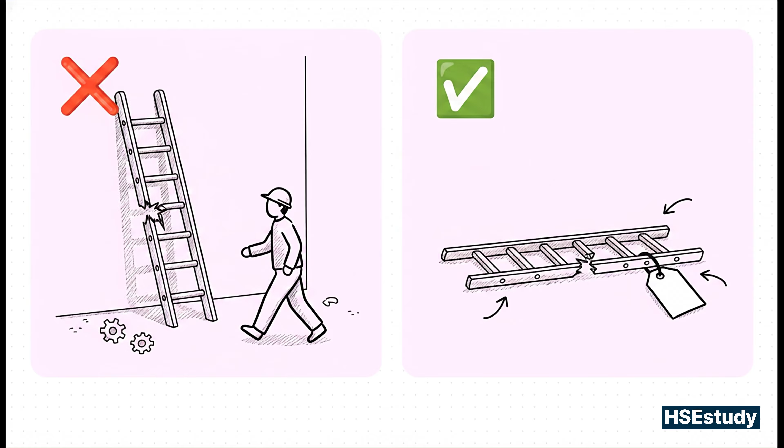Honestly, there are 2 ways people handle this. There's the lazy, dangerous reaction that gets people killed, leaving it leaning against the wall, or just hollering to the guys, "Hey, be careful on that one today." That is a massive OSHA violation and, frankly, a moral failure as a leader. Compare that to the strict correct action required by the standards.

You must immediately tag it with a sign clearly stating "do not use" or "defective," and you have to physically withdraw it from service. Move it completely away from the work area so nobody accidentally grabs it when they're in a hurry. It stays completely out of service until it is properly repaired to its original design criteria or just completely destroyed.

Now, throughout this whole explainer, we've thrown around the phrase competent person quite a bit. OSHA mentions it constantly, but I really need to clear up a massive misunderstanding in our industry right now. Taking a masterclass like this one gives you incredible life-saving knowledge, absolutely, but it does not automatically make you a competent person in the eyes of OSHA.

The true definition requires the knowledge to identify hazards, yes, for sure, but the crucial second half is that you must have the actual authorization to take prompt corrective measures to eliminate them. Only your employer can designate you as a competent person because they literally have to hand you the authority to stop work, buy new equipment, or shut down a dangerous operation on the spot.

So, to sum this all up, this is the core daily routine every single worker and supervisor must follow to ensure we all actually go home to our families at the end of the day. Number 1. Inspect your ladders and stairways before every single shift. Number 2. Set up for success. Secure your ladders, use that 4-to-1 ratio, make sure you're on firm level ground, and confirm stairways have the right angles and handrails.

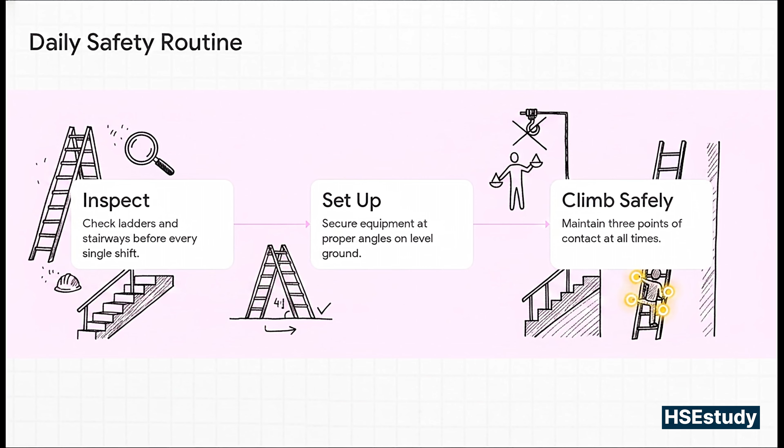Hey, I really want to congratulate you on completing this masterclass. You now possess the supervisor-level knowledge required to spot the hazards that most people walk right past. But remember, knowledge without action is useless. Be a safety leader on your job site, protect your crew, speak up when you see a bad ladder setup, and take the time to build safe stairways.